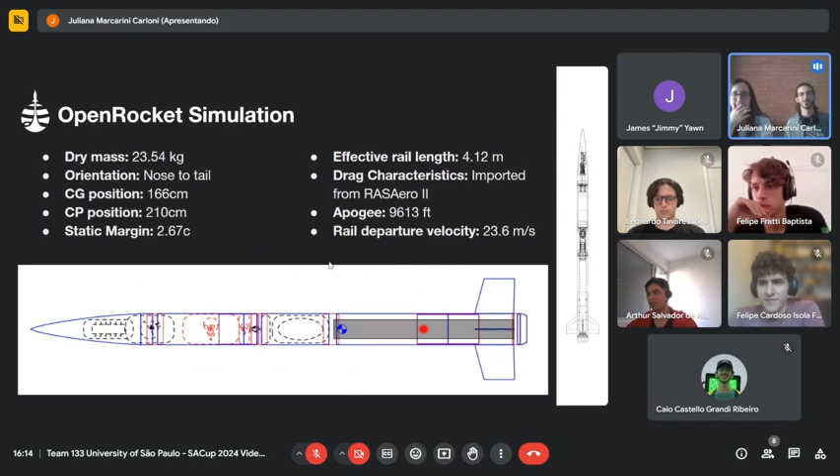So we're having a simulated apogee of 9,613 feet and a rail departure velocity of 23.6 meters per second. That's an upgrade for the departure velocity, which I'm really happy to see. Yes, it's a huge upgrade, and Leo will get into more detail on this later. It's a great relief for us too, because we don't like to work with really tight margins. So this is the complete flight simulation on OpenRocket.

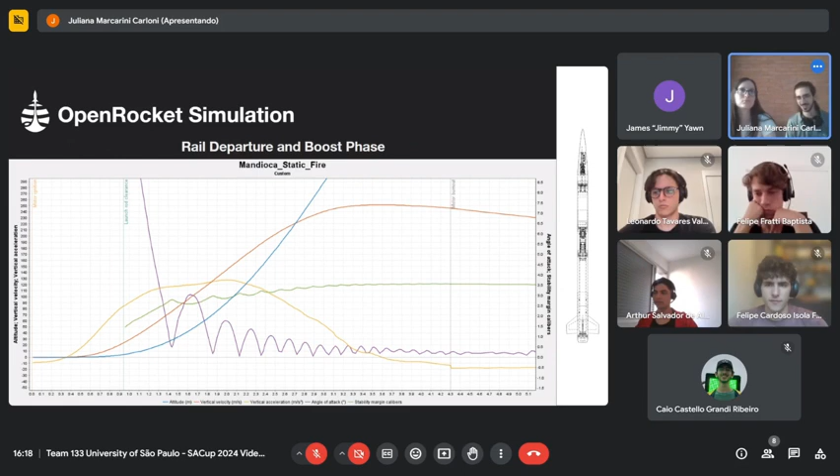So I'm going to go over to Arthur, who's going to explain the electronic systems in this rocket. Good afternoon, guys. I'm Arthur, the leader of the electronics team in Projeto Júpiter, and I'm going to give you an overview of our systems for this rocket.

In previous rockets, the electronics were very spread out throughout the rocket. We had the telemetry as part of the payload, and two identical modules to activate the ejection systems for recovery events. We had one set of altimeters for parachute ejection below the parachute, and another set in the nose cone for the disreefing event. I think Caio will go further into this in the recovery section.

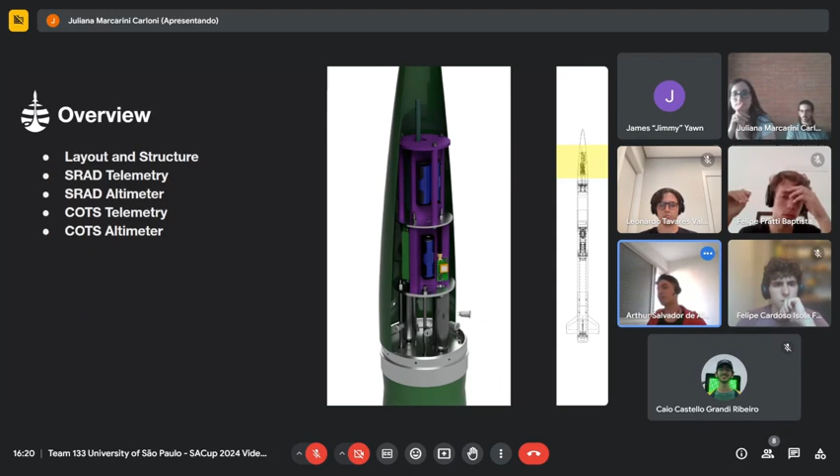For this rocket, we were able to invert the recovery. You can see in the images the cartridges are now in the nose cone pointed down. We were able to put both recovery events in the same module, so we only need two altimeters, the COTS and the SRAD. We also brought telemetry into the same module, which is better for us as a team since we don't have to integrate as much with other areas. Overall, it's a better design for us.

The module itself is mostly 3D printed, with some aluminum discs to support it. It's supported on top of the cartridges with threaded rods and nuts to lock everything together. It's very solid, and we also have key switches on the fuselage. We have four switches, each for a different system, to make things independent and redundant.

May I ask what material you're using for your 3D printed parts? It's PETG. Okay.

So it'll probably hold up in the heat. Yeah, and in our test flight we mentioned earlier, which was a ballistic flight, all the boards survived the ballistic flight. Oh really? Wow. Yeah, which was kind of surprising but great nonetheless. Well, very good.

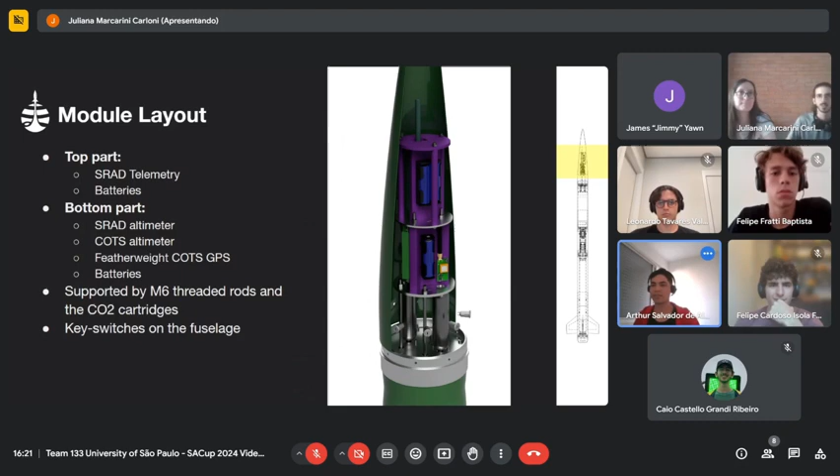The top structure is just like a vertical wall, and it holds the SRAD telemetry board. On one side it's screwed in with thermal inserts. Juliana is showing the module. On the back of the wall we put the batteries. We use two lithium-ion batteries to power the board in series, because transmitting requires a bit more power. We also have a top disk just for protection from debris or anything.

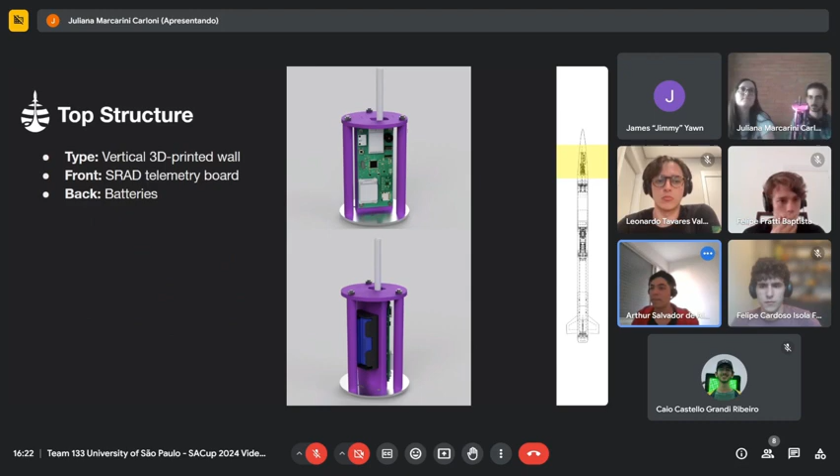The bottom structure is triangular. We have three 3D printed walls that fit together but are also independent, so we can take one out to work on the circuit, change batteries, or something, and put everything back together. The first wall has the COTS altimeter, the RRC3, which I'll talk about later. The other has the SRAD altimeter, and finally the featherweight GPS, which is the COTS GPS. They all have a lithium-ion battery to power them independently.

I have a question about the battery connectors, the battery bays. Yeah, sure.

Are they reasonably immune to inertial forces? Yeah, they are screwed in with thermal inserts behind the battery, and the walls have holes in which we fit zip ties. We put zip ties tightly to secure the battery so it doesn't fall out. Okay, and it can't move forward and backward and temporarily disconnect, right?

We had this problem once, but we solved it. Firstly, we put the spring of the battery housing down, so if we have a downforce, it works with the spring to not disconnect. And we really tighten the zip tie, really tight, so the battery really can't move.

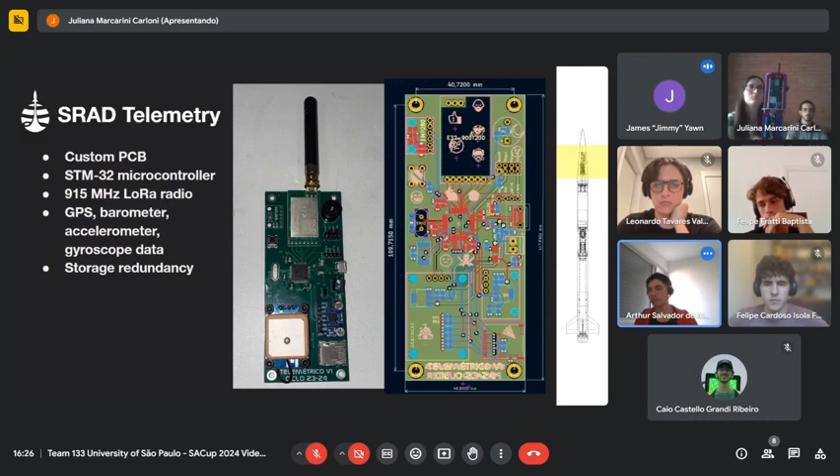We had GPS position, pressure, gyroscope, accelerometer, and it's based on the STM32 microcontroller and a bunch of sensors, plus the LoRa transmitter. I think that's it. Okay, it's pretty. You do good work. We're very proud of it.

And then we have the receiver board. This one we made ourselves in our lab. We're also very proud of it, it turned out really pretty. It's just a receiver, and it sends the data to the computer for the interface, which is the next slide.

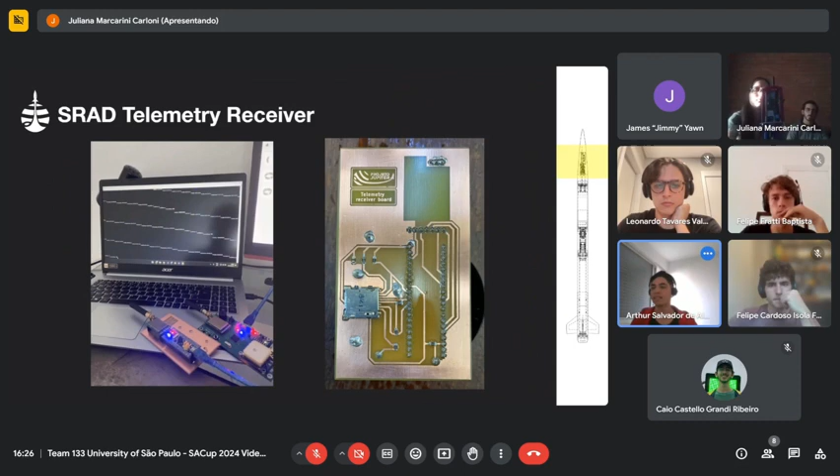Our interface, we're actually going to use this for the live video challenge. We're going to plug into the stream of the competition. It's an interface where we can see the data being transmitted from the rocket on the computer, for better visualization.

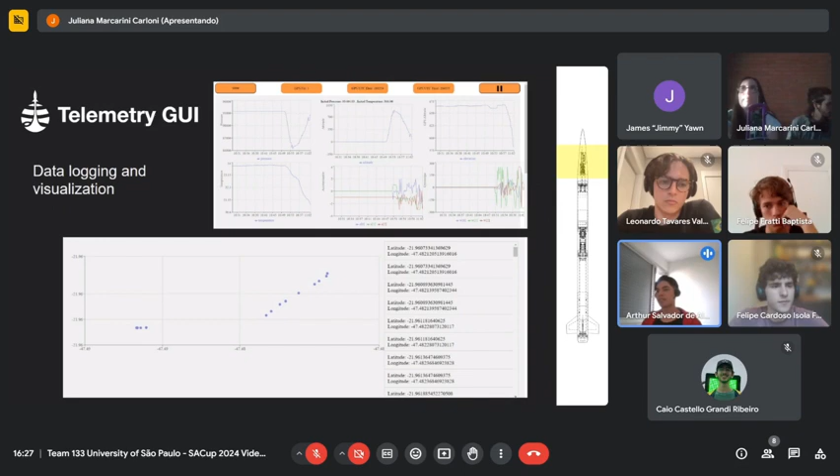Okay, so the COTS telemetry is the Featherweight. It has an independent battery, as you've seen, and an independent key switch, and it sends GPS data for the ground station. It's pretty simple. Good.

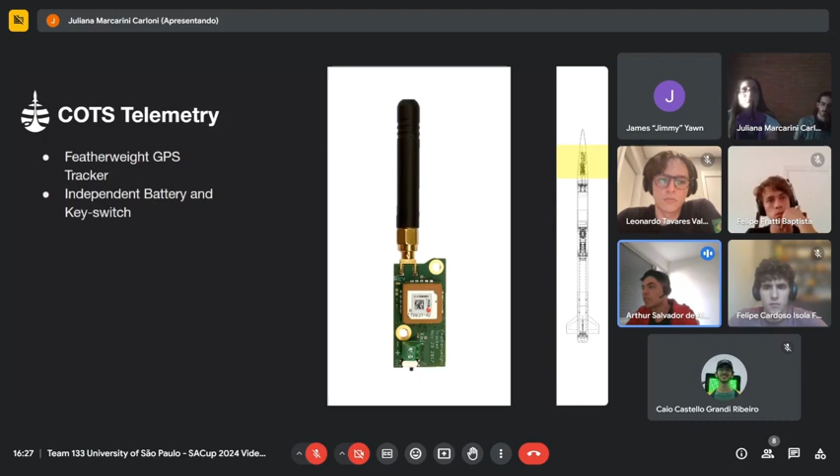And then we have the COTS altimeter, which is the official apogee logging system. We've worked with it, I think, ever since Jupiter existed, so we have loads of experience with it. It also has its own battery and key switch, independent.

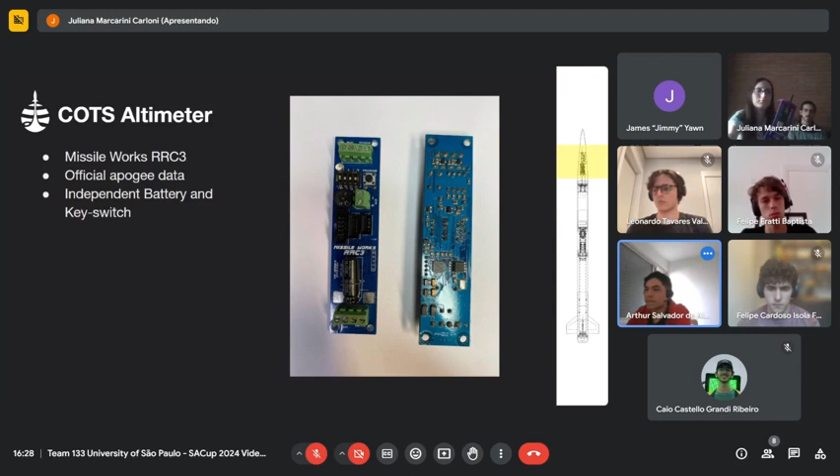And then this is our novel SRAD altimeter. It's actually the second version of it. We made it the same form factor as the RRC3, which is the COTS one, to make them interchangeable. If we have any problems, we can just put a COTS one there — like two COTS, not one SRAD and one COTS.

And it's kind of similar to the telemetry board. It's the same microcontroller, the same barometer, but then we have data redundancy — two different storage modules in the board — and we've designed some circuitry to make the board better than the first version. We have impact detection and reverse polarity circuitry.

Sorry, in case we connect the batteries with the positive and negative reversed, which has happened, and we fried one board. Yes, it can be done. Really sad.

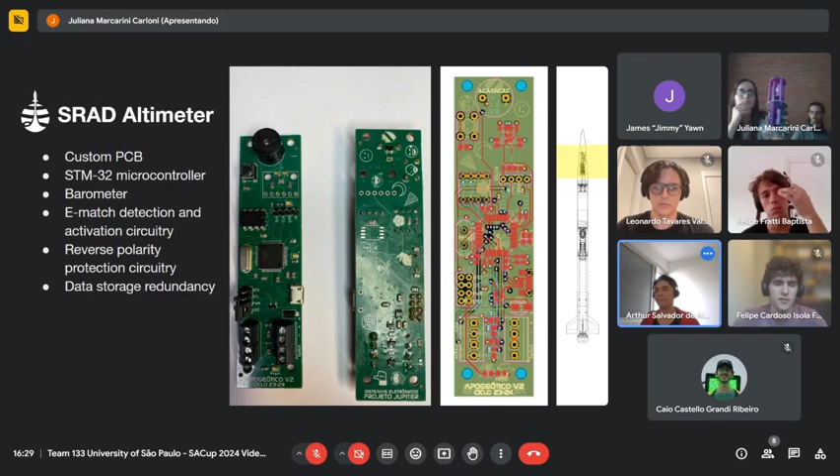And we now have a USB interface as well, to make it easier for us to acquire the data and to program it. And you can pass, I think. It's also pretty.

Quality in the making of PCBs.

So the software it runs, we have tested it many times. It's an adaptive filter, and it takes the discrete pressure data and turns it into a parabola, and we compare it to a reference parabola to find the vertex of the parabola, and then we can find the apogee. We have worked with it, we have launched it, and it works, and we are very confident.

And then in the graph you can see the filtering that it does, and it takes the noisy data and turns it into a smooth parabola as best as possible.

That's very interesting to me. Let me turn on my camera for a second. Where'd it go? Oh, there it is. Oh yeah, here we go.

Here's something I'm developing. It's an altimeter to fly on a model rocket with a C motor. It uses a Raspberry Pi Pico and a couple of chips on the other side, so it's like $10 worth of parts to put it together. The main deficiency is a very simple program I'm using to control it, doesn't have any kind of error correction, so it's not very accurate.

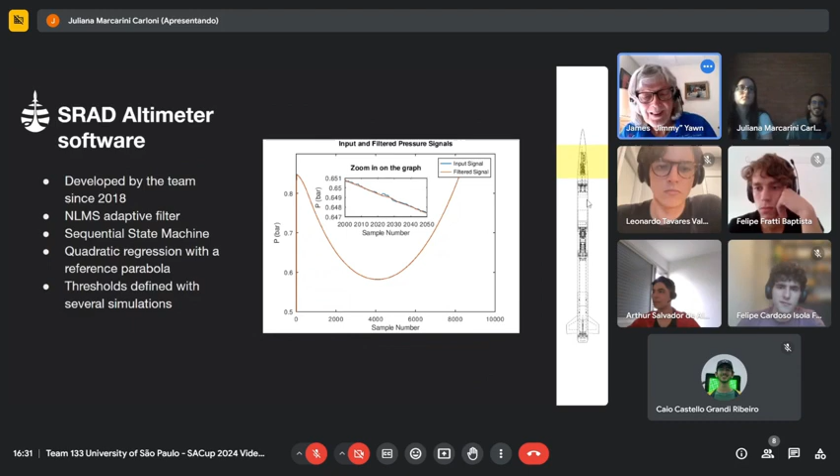Okay, so this is the testing we do of the altimeter, one of the tests, and it's the simulation, the ground flight simulation test. So we get the pressure curve, the simulated pressure curve with noise, and we feed it to the algorithm as if it was coming from the barometer, but it's not. It's pre-coded, it's hard-coded, but we treat it as if it was coming from the barometer, and then we just let the code run, and we see if the stages will be detected and activated, and we see if it will beep the apogee as it would in a flight condition.

And then I brought the video for you guys. I don't think... wait, is the sound coming through, Jimmy? I don't think so. Okay, I just hear some sound, hear a little beeping.

Oh, okay, I saw something. I'm sorry for the long video, but it's really the flight simulation. Oh, so this is the time that the full flight would have taken. Yeah, yeah, all the way to, the first one was the apogee, okay, and then the reefing is going to happen in a while. More fireworks, yay. So that's what we do to test if the algorithm works with the pressure data we are expected to have.

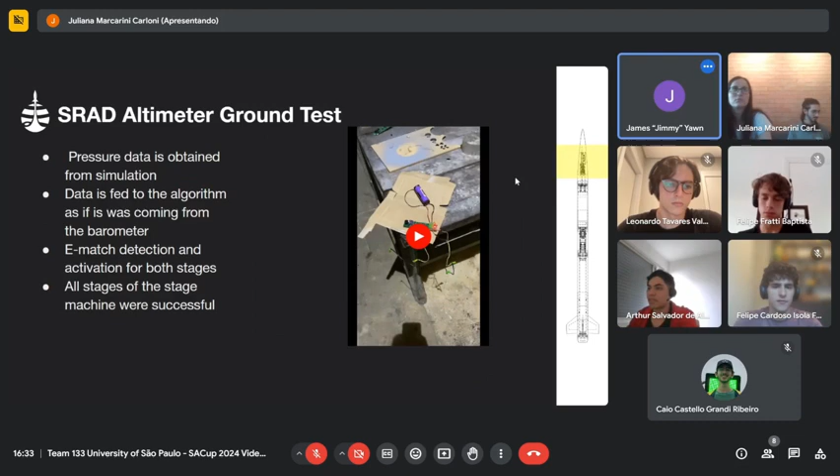And then we have the wiring and assembly of the module. This is the mini rocket that we launched in... I don't know, our flight, not a competition, sorry. And we always use a color code to wire the boards. The key switch for each board has a color. The connection to recovery has a color for each of the systems, SRAD and COTS, main and drogue, which is apogee and the reefing.

We use the screw terminals to connect the wires to the PCB boards. And then for crimping the wires, we always use just the metal tubes without plastic and the heat shrink transparent to make things visible and to see if the connection and the fixation was good. I think that's it, guys.

Okay, so I didn't present myself. I'm Kyle, I'm the recovery leader of the team, and I'm going to go over the recovery system that we're boarding on this rocket. So a quick overview.

It's going to be a reefed quarter-spherical parachute. Then I'm going to go through the linkages and shock cords, the CO2 ejection system, shear pin locking system, which is brand new, pyrotechnic disreefing system, and I'm going to go over the performance on past flights.

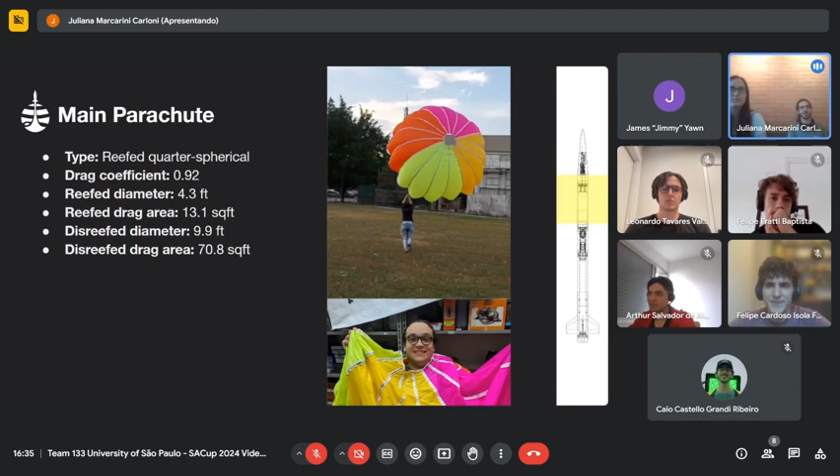Disreefed diameter of 10 feet, and disreefed drag area of 70.8 square feet. Okay, so this is it.

The first event will be trigger apogee, which will be the parachute ejection. It will be ejected out of the rocket in its reefed state, and it will cause an opening force on the fore section of the rocket, which is the nose cone and avionics bay, of 163 pounds force. On the aft section, which is the payload and rocket engine, it will be an opening force of 270 pounds force. The terminal velocity during the reef stage will be 72.2 feet per second.

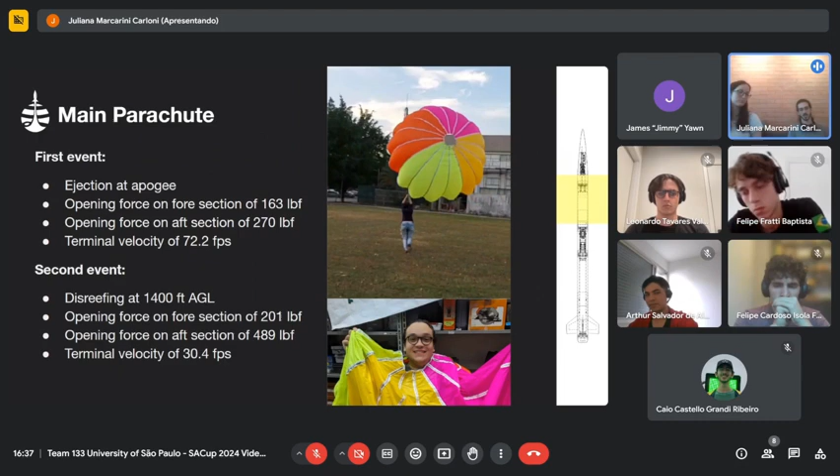So this is how the linkages are structured for this rocket. I can show some things because they're all laying around on the floor here. This is the riser, the part that will connect the parachute to the rest of the rocket. Here we have the carabiner that will attach to the parachute, the mounting structure for the line cutters, and the attachment points for the wiring harness for the disreefing, which are those little loops over here on the riser. Oh sorry, the shock cord.

All the connection points to the parachute and to the rocket are going to be done with quick links rated up to 1,350 pounds force, and we're going to use a swiveling link like this, I think you can see it, also rated to 1,350 pounds force.

The shock cords are made out of tubular polyester, rated to 3,600 pound force. We stretched them quite a bit from our first progress report, as you and Rick commented that it would help absorb some of the opening impact on the connection points. All the stitches on the connecting points are done with polyamide threads. This is an improved version of the same method we have been using since 2022, with some improvements here and there to make it stronger.

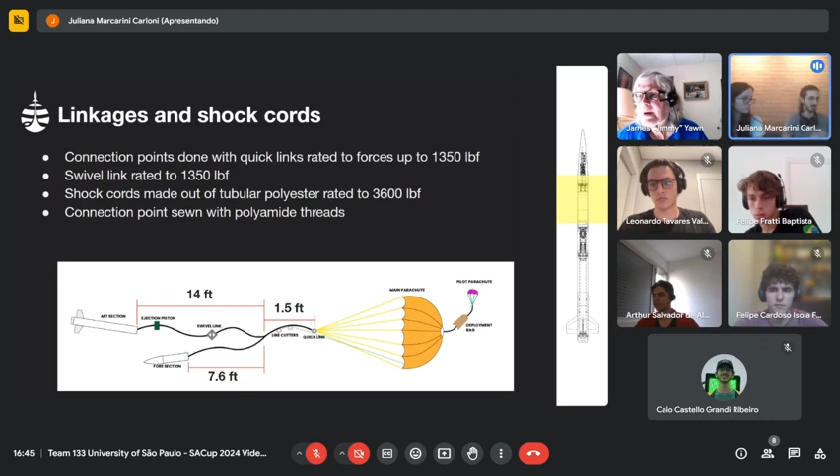All right, okay, so moving on to the ejection system. This is our good old trusty CO2 discharge ejection system.

We have a main charge of 45 grams and a backup charge of 45 grams, which we know is a lot compared to what other teams do, but it has worked for us. It has given us plenty of clearance at ejection. Since we're changing some things in the overall rocket layout, we're working with a larger diameter, so we'd rather have ejection that's more powerful than one that's not powerful enough.

Yes, I agree, especially since we're using shear pins, so we really want to make sure they'll break. It's a redundant activation by the COTS and SRAD altimeters. The ejectors are wired in parallel to each altimeter, so if one of the altimeters fails, both ejectors will still trigger, which is great. That means we can have one altimeter fail and one ejector fail, and still have a successful ejection.

And we have... where did I leave it? Oh, I messed up, okay.

Okay, we have a PETG piston that helps push everything out. It goes on top of everything here, touches the connection, and helps create a stronger pushing force that ejects everything successfully.

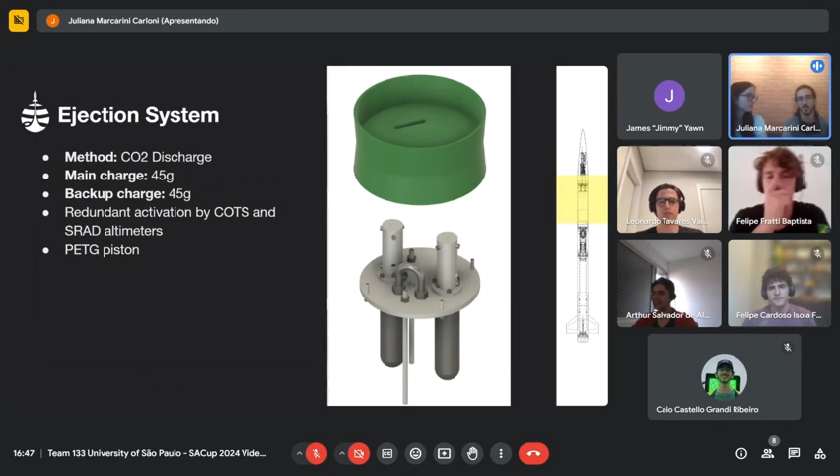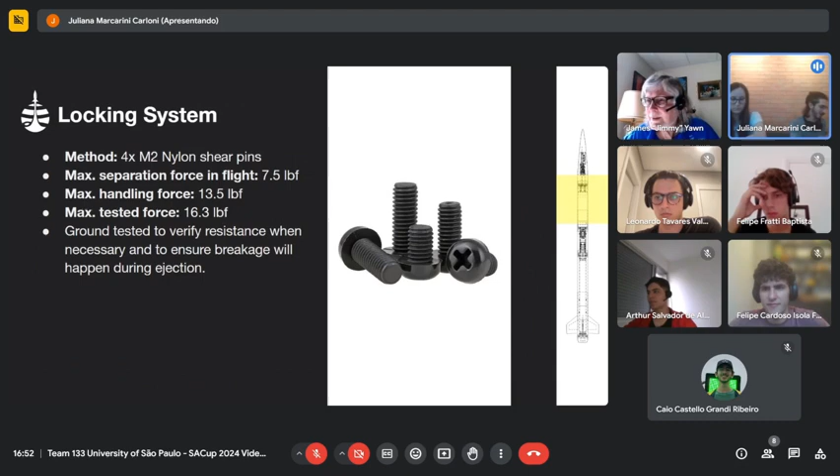Was that at a competition? I missed a little bit of that. No, this is our self-operated flights that we run only for testing subsystems.

This is the disreefing system, which is pyrotechnical with black powder. It's really simple, a sort of brute force approach. I have one assembled here. We use paracord core strands that run into this black powder chamber, and it fits on the harness, onto the shock cord. When it's triggered, it blows up the strands, and the paracord is free to run away, allowing the parachute to open fully.

We have one charge of 1 gram, and another one. They are in series, one on top of the other, so if one ruptures the cord can still run through, giving us redundancy. They are also wired in parallel with the COTS and SRAD altimeters. The wires are fed through loops on the shock cord, which I showed you, to avoid tangling and excessive tensioning so it doesn't rupture in flight.

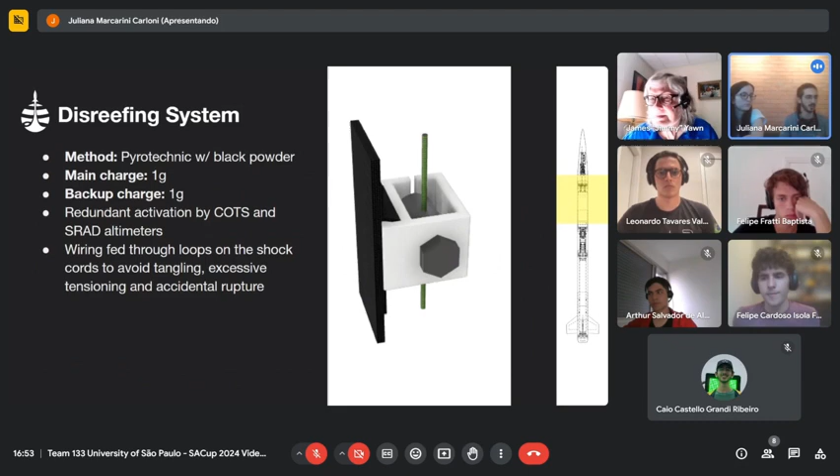In past flights with the system, we had a nominal recovery in 2022. In the test flight in 2023, we had ejection, and it was the first occasion where the wiring harness ruptured due to a miscalculation of wire length. What we added to the assembly routine was a stretch test, where we lay everything on the floor, pull the nose cone as far away from the rocket as possible until everything stretches, pulling from both ends to check if we have enough slack so it won't rupture on the opening force.

In 2023, as I mentioned, we had ejection. The disreefing was triggered, the control line was cut, but it didn't slide due to the twisting of the shroud lines of the parachute. We fixed that by changing the swiveling position. I don't know if you're aware, since I don't think you're judged in this category, but we took inspiration from Waterloo University and how they handle swiveling, so our system in theory is as effective as theirs in surviving twisting of the lines.

So I hope we have no problems. They didn't have a problem. Oh, and I hope we have no problems. We're testing this on and on. And I'm still passing the slides on the wrong computer. So that's it.

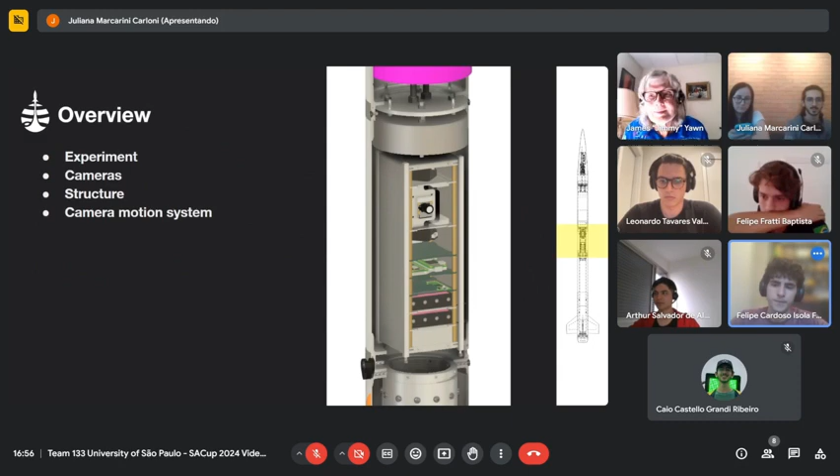Our experiment this year is called Tiltado, an acronym for the Image Leveling, Tracking, and Attitude Determination Operator. We thought about the letters for a long time so that it made sense. Sounds like it's tilting.

The main goal of the experiment is to develop video capturing systems on the rocket under high vibration and acceleration, so that in the future we can experiment with computer vision, and have better camera systems for marketing purposes to record the flight. That's something we weren't able to do yet, the in-flight video recording.

We're also going to work with attitude estimation of the rocket and control systems, by controlling the axis of the camera, which is attached to a motor that can rotate on its axis. The objective is that during the flight, we try to maintain the horizon line level with the camera in relation to its reference system.

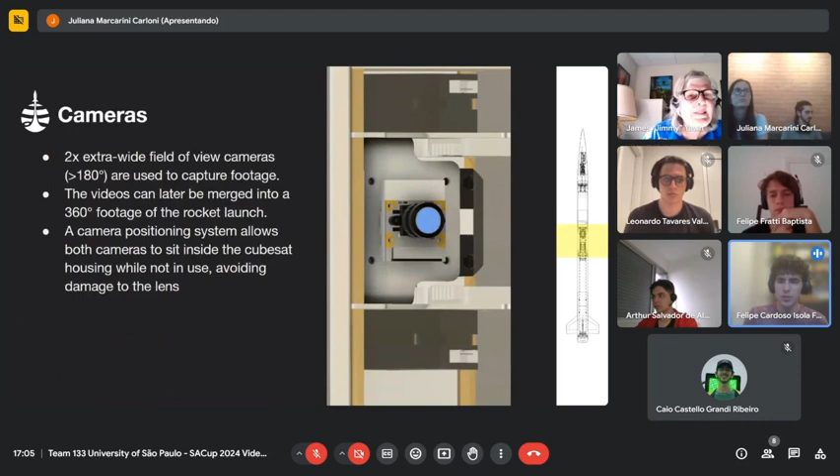And yeah, this is the whole experiment. And we can back up a little bit to slides. Pode ir para frente, one forward. I look forward to watching the movie.

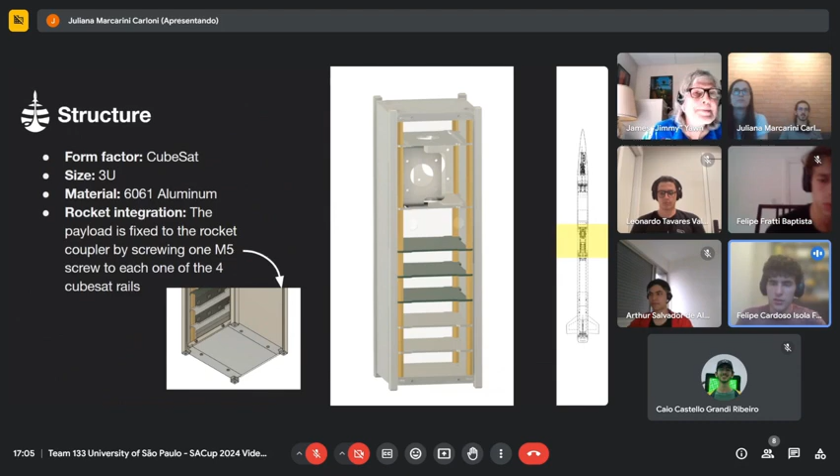I think we have the empty shelves in this photo, but now we have a newer photo with the components. And we have a structure of the payload inside the CubeSat form factor, organized in shelves.

That helps a lot while you're putting together the system. And the basic premise of the main parts of the system: we have the power supply.

Actually 8 lithium-ion batteries, split into different power supply sources. We have 4 of them that are going to be used for an independent power supply for the motors, 12 volts. And we have 3 of them for the main electronic components of the system, and 1 of them that is going to be for the third PCB board that isn't directly related to the payload itself, but is an experiment we're doing for our group.

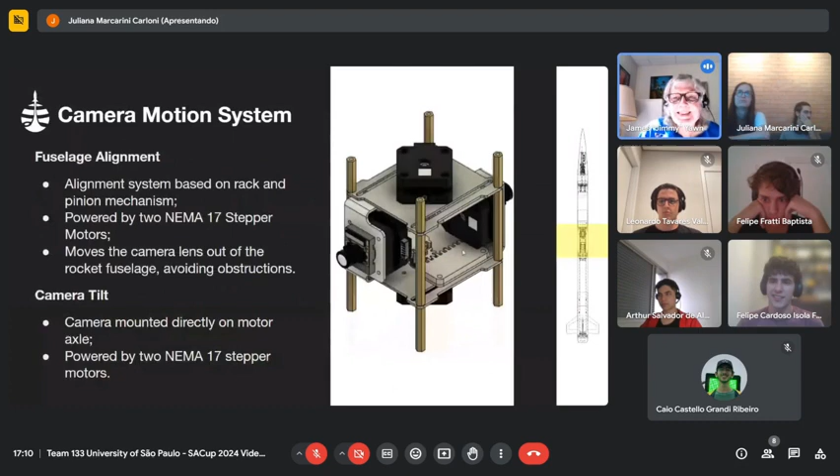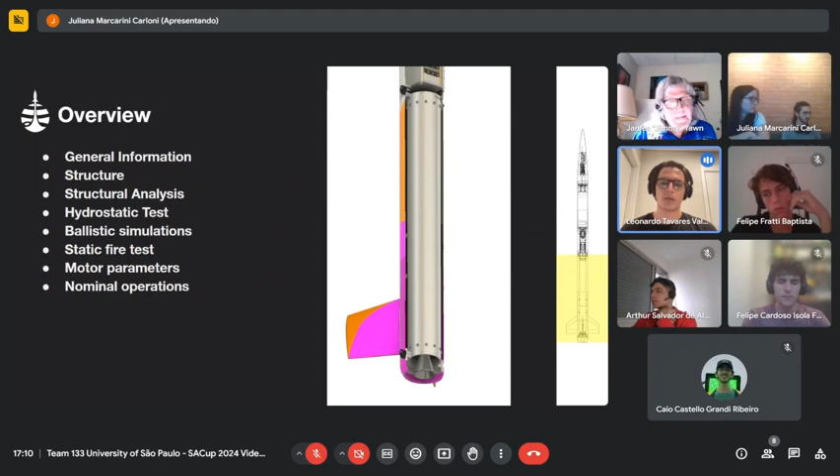So I'll be passing an overview through the propulsion systems. You get general information about the motor, the structure and its analysis, the tests we made, the simulations for the design of the motor, then the motor parameters, and another flights that we used that motor. Actually, it's the same motor that we used last year in June 3. So we can pass on.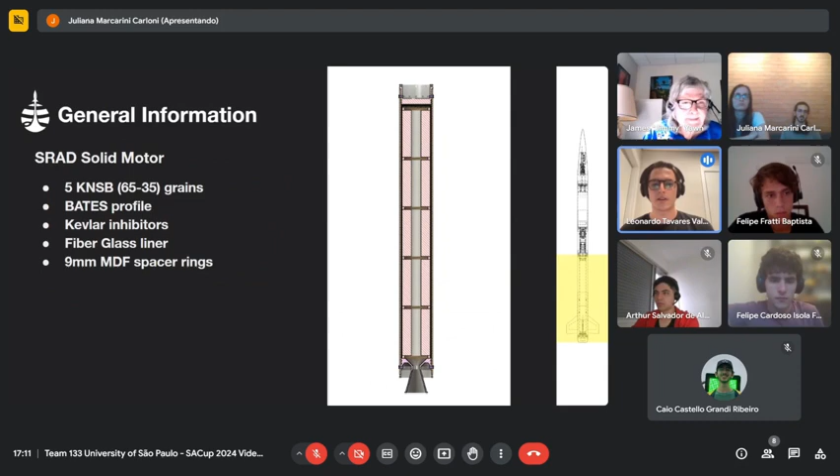For the structure, we use 6101 aluminum casing with 2 lines of 12 M6 steel bolts for the nozzle and the bulkhead, 2 O-rings on each closure for sealing, and the bulkhead is made of aluminum 6351, while the nozzle is 1020 steel.

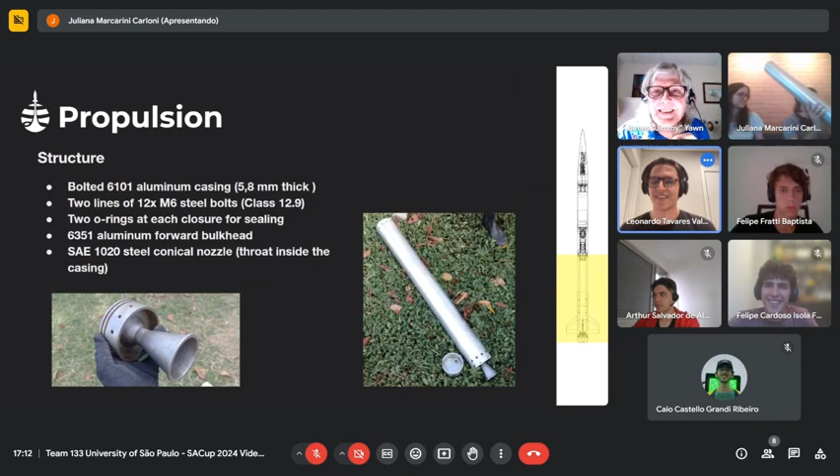We also have the chamber. It's a big one. I like big ones, it's a bigger rocket.

So for the structural analysis, we analyze bolt shear, tear-out, bearing failure, case tensile, and von Mises yield failures. For the analytical analysis, we got the lowest safety factor of 2.2 for the bearing, and in the finite elements analysis, 2.48.

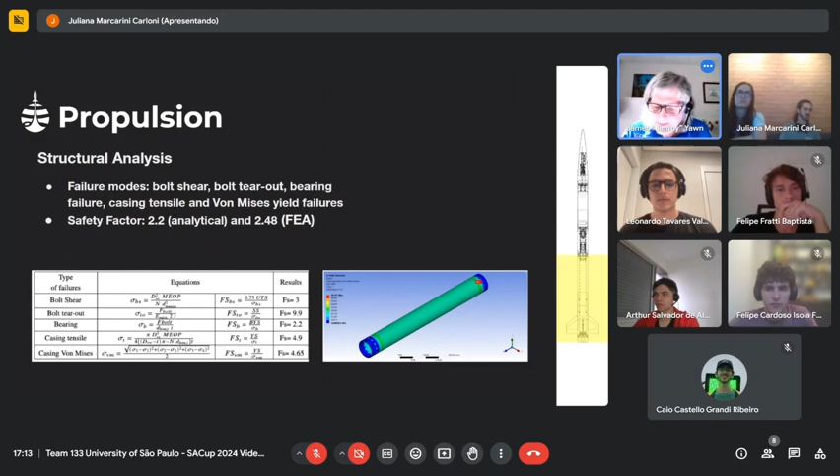Passing to the hydrostatic pressure testing: with a hydraulic pump, we hold a pressure of 90 bar inside the chamber for 100 seconds to verify if there was any leaking or damage to the structure.

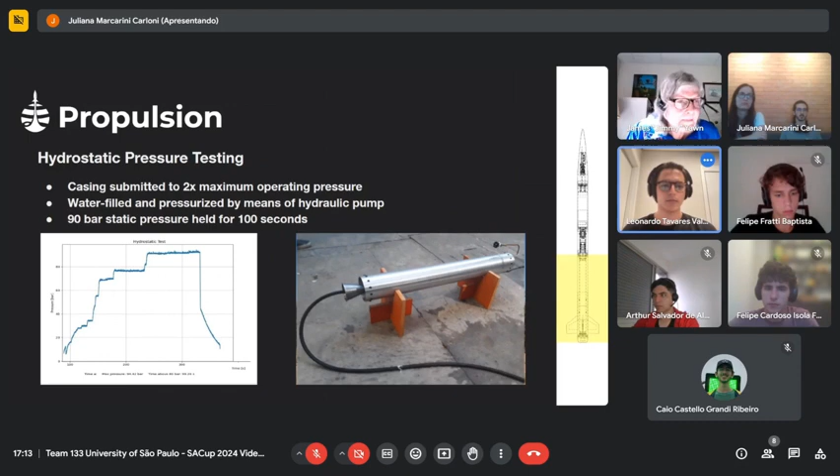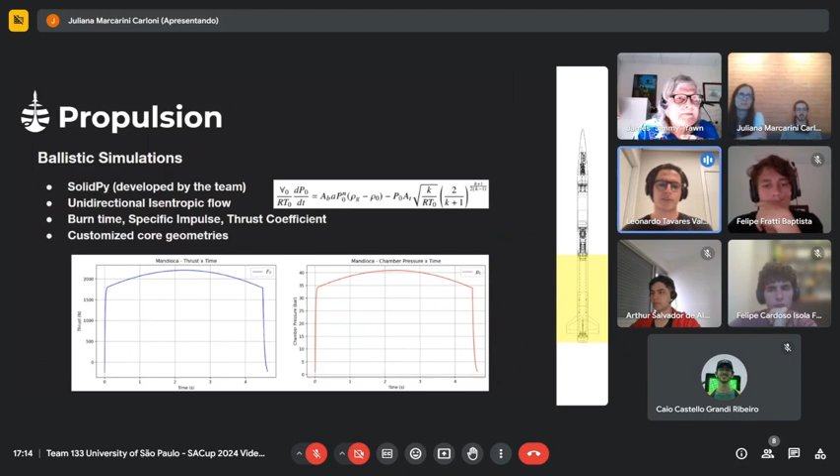For the ballistic simulations, we use our own open source software, SolidPy, developed by the team, using unidirectional isentropic flow for the ballistic calculations, in which we get the burn time, specific impulse, and thrust coefficient. In the software we can use customized core geometries. The results for this motor were cross-checked with OpenMotor.

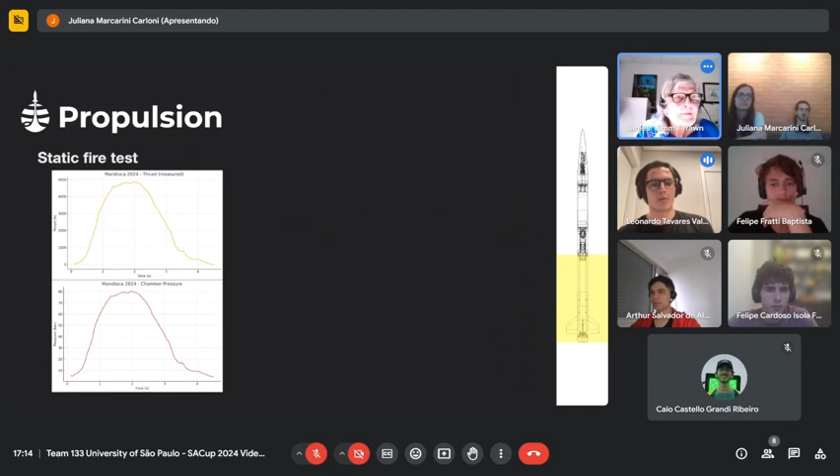So this year we managed to make another static fire test, shown in the following video.

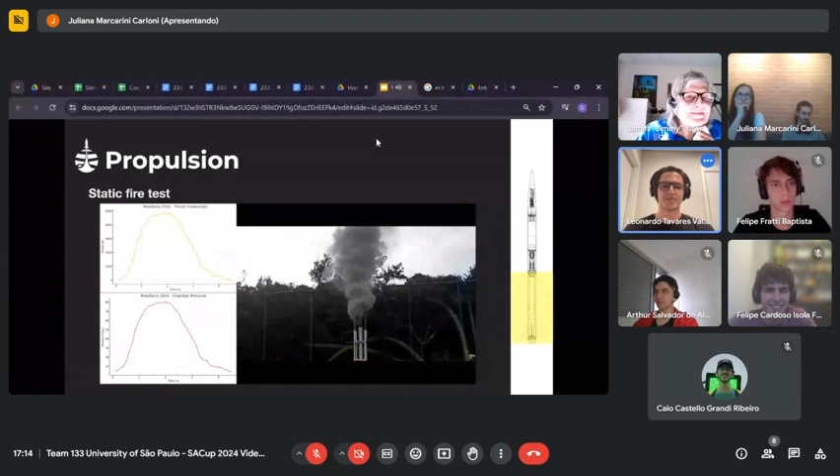In which we were able to measure the thrust and the chamber pressure curve.

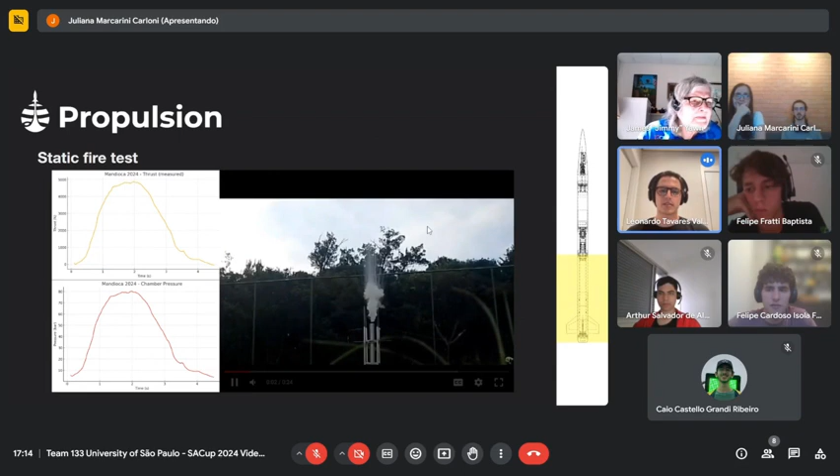Passing on, here are the general parameters for the motor: 17.9 pounds of propellant with a load mass of 34.4 and a burn time of 4.3. That was a little improvement from last year in burn time. So we got a lower burn time and a higher max thrust this year in this year's test.

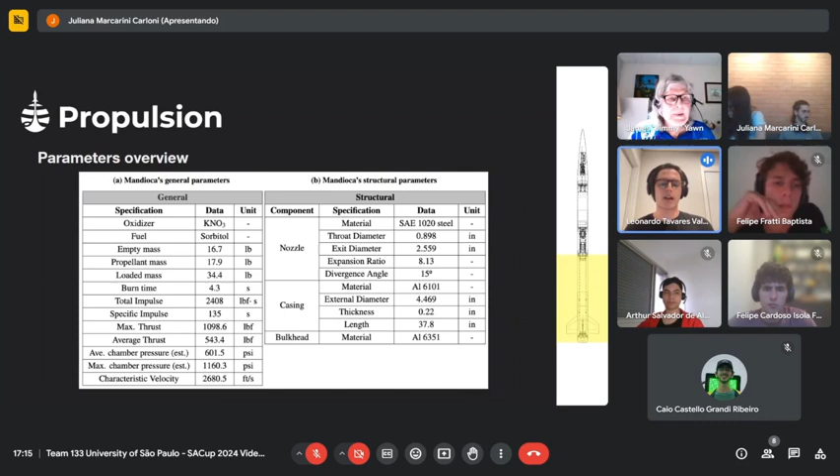As I said, this motor was used on previous rockets, so it will have nominal operations. These both competitions happened in Brazil, COBRUF and LASC. This motor was actually born in 2017, so it's a little old motor. The motor was used in Imperius at COBRUF and in Juno 2 at LASC.

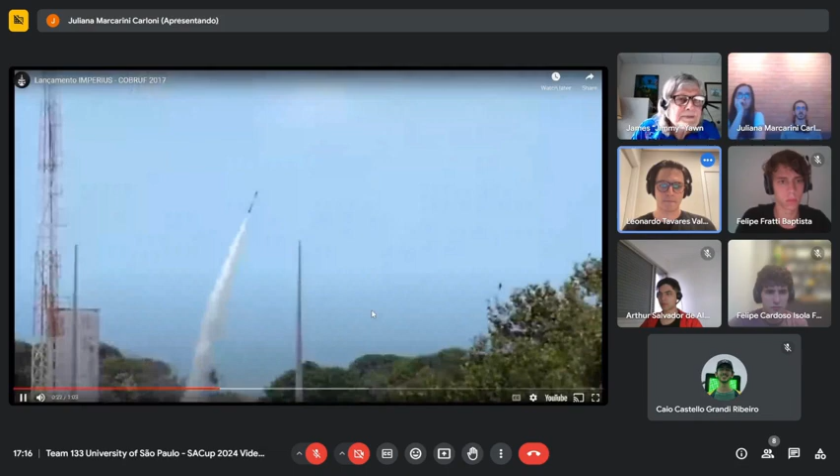Below we have the following videos of the launches.

And for the LASC launch.

And last but not least, last year we actually used this motor at Spaceport America Cup. Here are the videos for the launch.

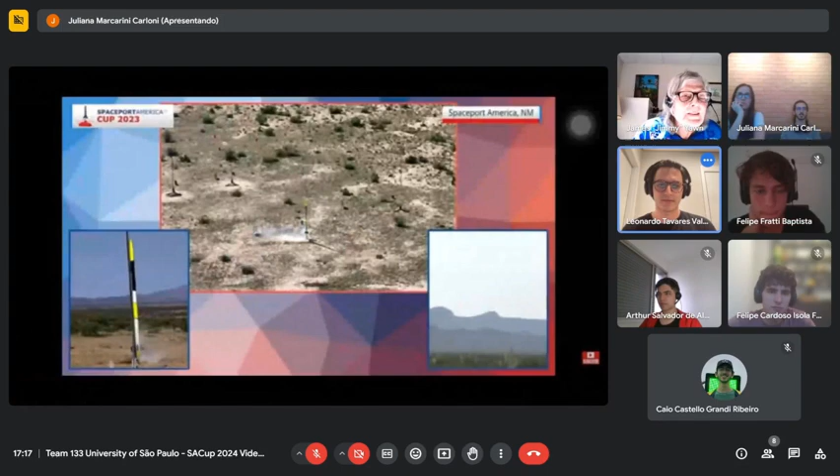Very nice, I love your movies. You never get used to it, right?

Yeah, so that's the propulsion section. We used the same motor as last year. We passed this year since last Spaceport improving our propellant manufacturing. In that matter, we were able to achieve some improvement in thrust that resulted in a better rail velocity.

It looks like you have a very well developed motor, and apparently you've mastered the making of propellant. I'm proud of you for doing that. Thank you.

Hi Jimmy, hi everyone. I'm Felipe, another Felipe. And I'm gonna talk about the aerodynamic surface and some structural bodies of the rocket. There is an overview.

I will talk about nose cone, fins, boat tail, fuselage, couplers, rail attachment, and structural analysis. I'll begin with the nose cone. The shape of it is von Karman, from the Haack series. Kyle will show it to you now. The total length, the curve section is almost the total length.

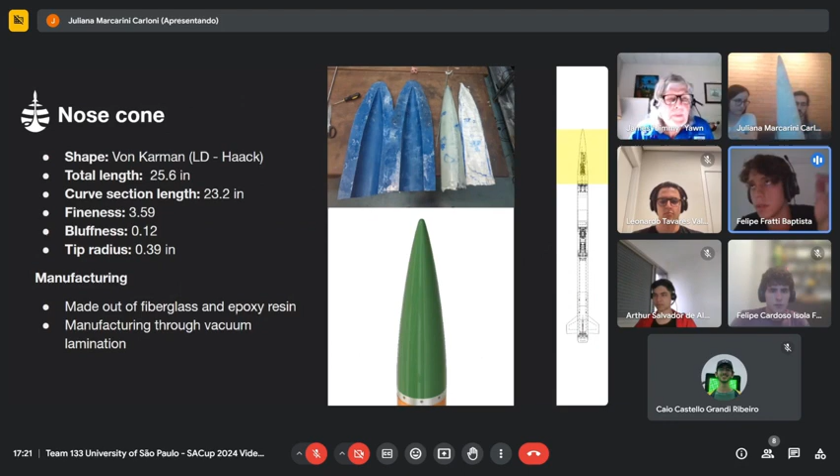It's made of fiberglass and epoxy resin. Last year we used 3D printing because of the shape of the nose cone, but it had some problems. It's heavier than this one, and another issue was that the last nose cone was made of PETG reinforced with fiberglass, but the part attached to the couplers was not reinforced because we needed to use adhesive there. So this year we changed it, and it became lighter and better in its structural function.

Now I will talk about the fins. We use an airfoil in our fins. The shape of the airfoil is not the standard NACA 0012, I don't know how to say this in English.

Sorry, but we do something new in this, just something we used in the last project of SACUP. We call it truncated - it's like a cut in the final section of the airfoil.

The main result of it is that it becomes stronger, because when we need to recover the rocket, it needs to... how can I say, it needs to become, sorry I forgot the word. The purpose is structural, and it needs the tip of the airfoil to be hard to not break.

We had some other cases where the tip would break, so we reduced a section of the airfoil. That could be better to avoid unpredictability in flight or at separation and recovery points. We did some CFD tests to see the difference, and the drag difference was minimal, so it's not significant.

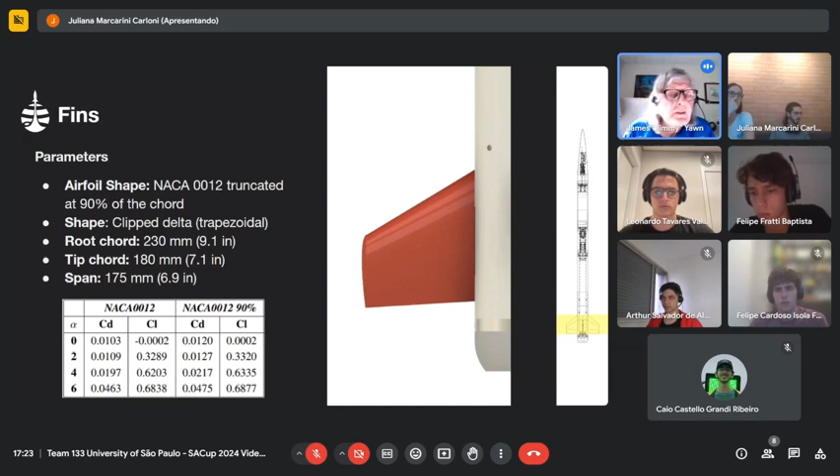I have a question about how the fins are mounted. I will show it in the next slide. Oh, you're getting there. No, it's okay, perfect, good timing.

About the manufacturing of the fins, the airfoils are 3D printed, and the fin cores are made of carbon fiber. The reason is it's hard to manufacture the airfoil, so we need to 3D print it, but for better resistance we use a carbon fiber core in the middle of the fin for more strength.

We attached the core and the airfoil with the same adhesive that we use in the couplers and tubes. Another thing we use in attaching the fins to the rocket is a tip-to-tip method to reinforce the section, since we know this attachment area is very fragile.

So we reinforced it with fiberglass, and some holes we fill with flux, the cotton fiber, so we don't have problems with it. As shown in the image.

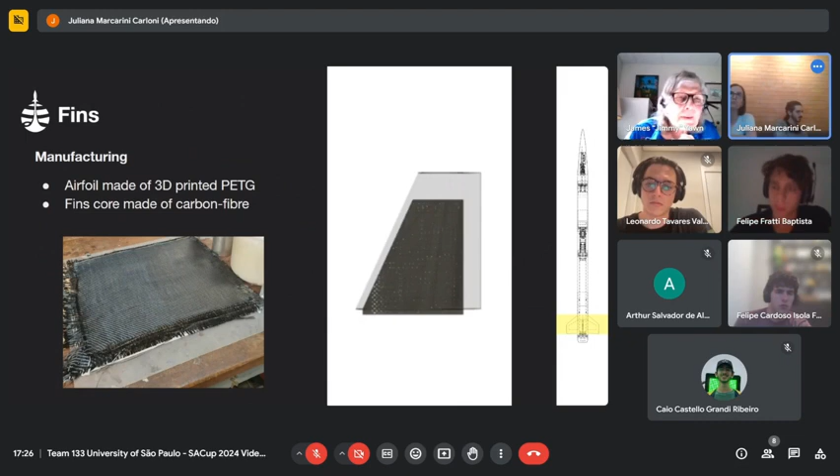Now, this picture, I have a question about it too.

It looks like you're just getting started with the tip to tip. I assume the fiberglass will go all the way over the fins and down the other side. No, we just do it in the intersection sections, not all over the fin. It goes from the tip of one fin, over the fuselage, to the tip of the other fin with a single fiberglass strip. This is to even out the filleting part so that it doesn't kink over there.

Now I will talk about the boat tail. The shape was a circular arc. For the boat tail, we used a NACA memorandum to design it, for 0.6 Mach, which we thought was the proper velocity to design it. The manufacturing of the boat tail was the same as the nose cone, but it's a little bit easier because both sides of the boat tail are open, so it's easier to manufacture. We use the same vacuum lamination so it becomes lighter.

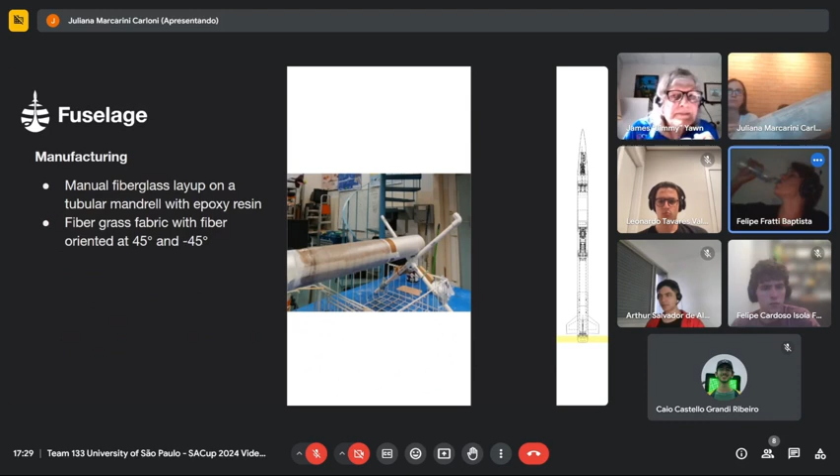Now we'll talk about the couplers that we use in the tubes. Juliana and Caio are showing it to you. They are machined out of aluminum 6351-T6. They form a male and female system, a pair, which as the name says is standard, so we can change tubes if needed. It's like a male and female to make it modular and easier to attach the modules of the rocket. The bulkheads are bolted to an internal flange. You can see the bolts inside it. This works very well.

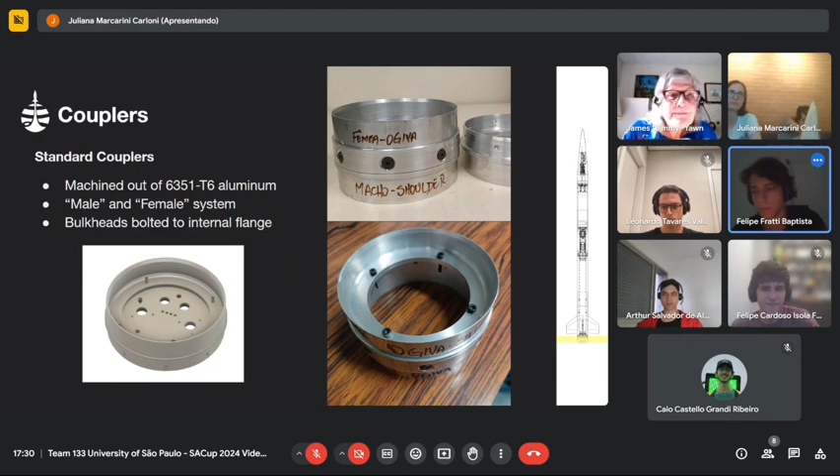About the recovery, we have a coupler in the recovery system, so it can slide in the tube and we can do the recovery. The coupler is made out of fiberglass and epoxy resin, same as the boat tail, same as the nose cone and the fuselage tube. We attached it to the fuselage with Araldite adhesive, the same one we use in the couplers in the fuselage too.

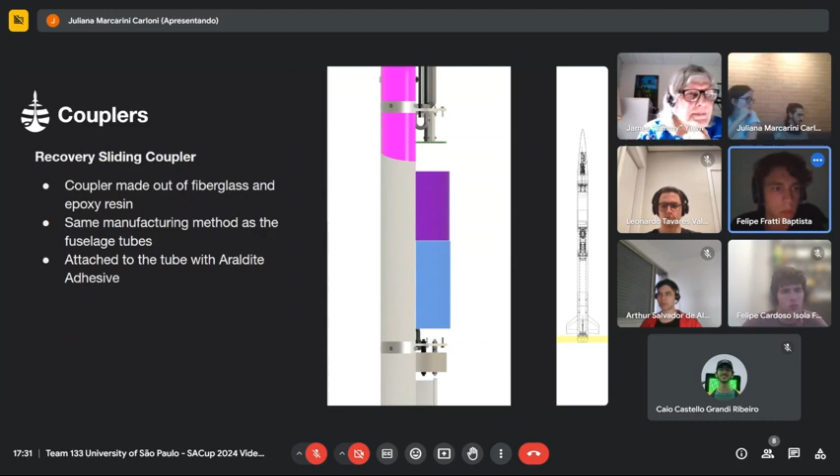We have the motor tube coupler. The motor tube is separated into two parts to facilitate packing the fuselage in the bags, since with the fins it's a little bit hard to transport. The coupler is made out of fiberglass and epoxy resin, and it has one diameter of interface in each tube, as recommended in the manual, to give enough length to this coupler. In this tube we don't have a structural purpose, because the motor chamber and other parts of the motor have the structural function in this case.

The last part is the rail attachment. It's made in an airfoil-shaped rail button and attached with the couplers using bolts, so we screw it in. Nowadays we manufacture our own rail buttons, but I think for the competition we bought some for their properties.

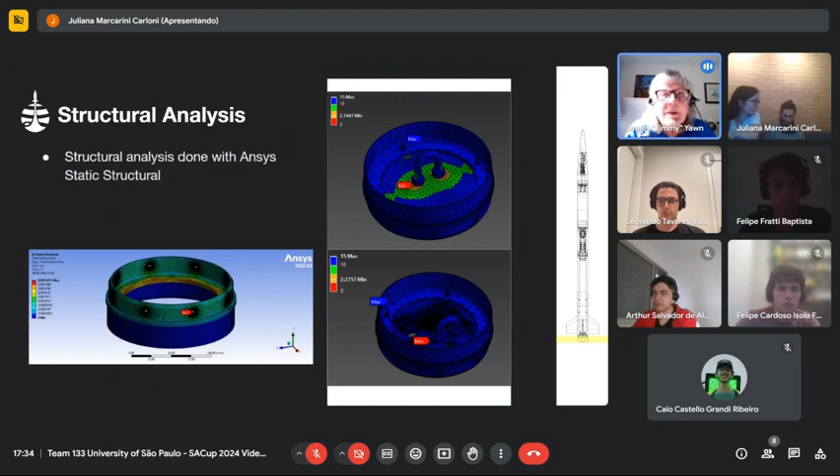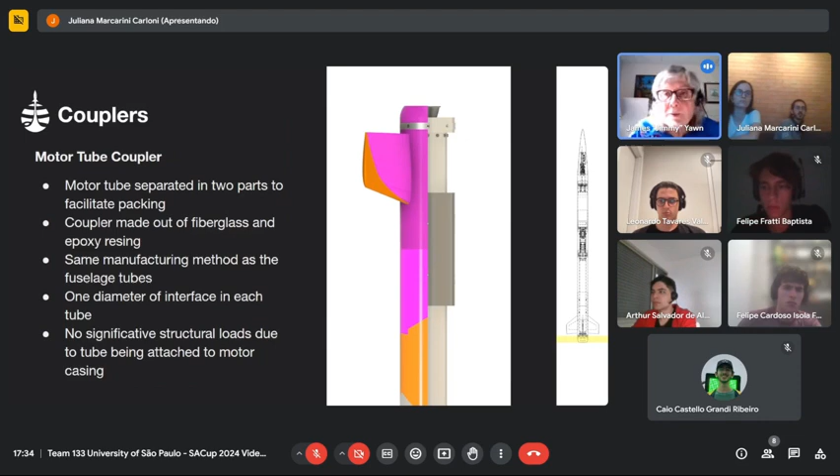I'd like to go back to the aft end of the rocket with a boat tail. My question is, what is your motor retainer? What holds the motor in the rocket? Oops, sorry, I forgot to put in that image, but we have a special coupler.

Okay, I'm really sorry. Oh, that's okay. This is it. Let me just turn on the cut here so you can see it better. Where is the cut? Okay, here.

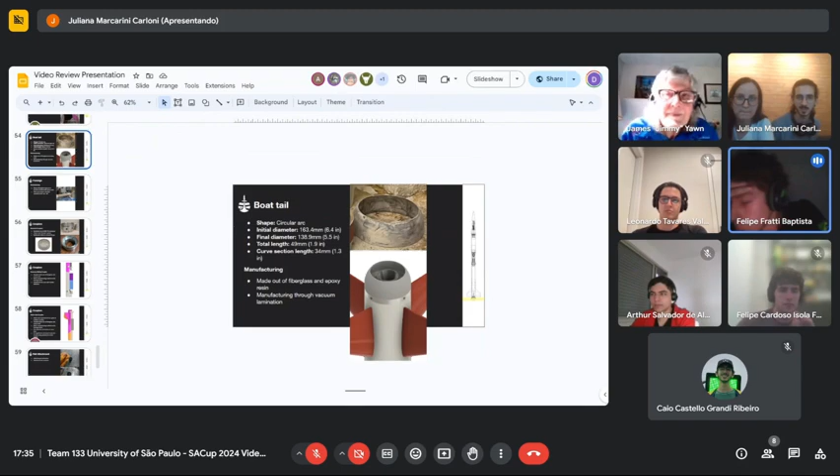But they will show to you. It's a coupler that stays at the end of the rocket. It's attached to the motor body and the boat tail, and it has the same diameter as the motor. So with the friction, it can align the motor, and the motor is screwed.

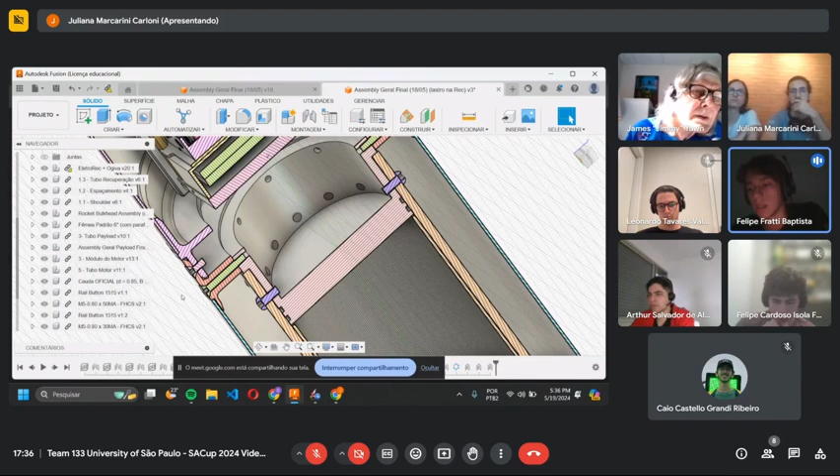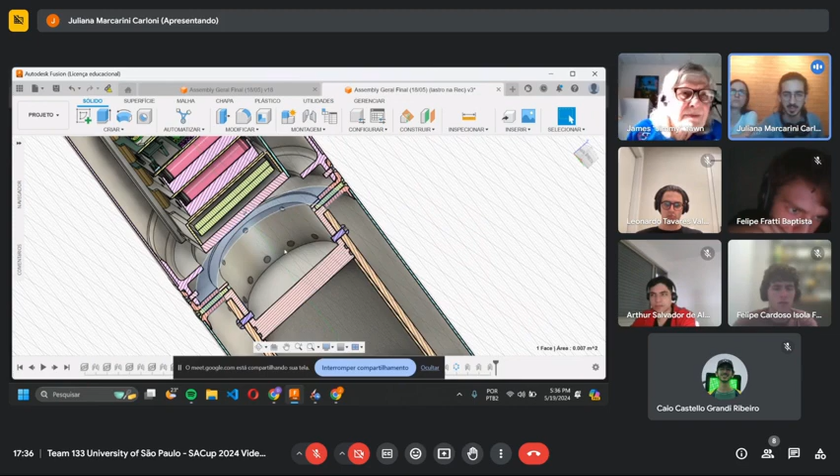The upper part of the motor is screwed into the coupler. Here you can see in pink or salmon, whichever color it is, this is the forward closure of the motor, and it is directly attached to this coupler, which is sort of a double coupler. It works as a female coupler on the top side, and it has a centering ring here.

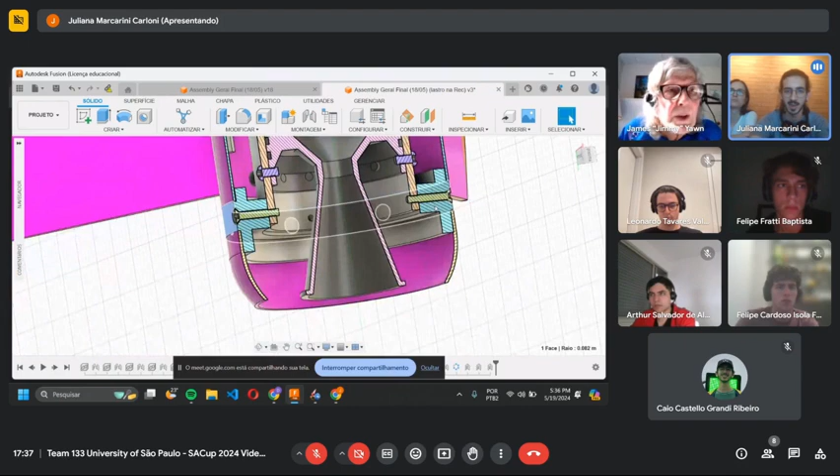So it holds the motor by the forward closure and the motor tube. This tube actually suffers no load, or little load, because it shares the load with the rocket structure itself. And on the bottom we have another centering ring here in cyan that holds the motor and the fuselage together.

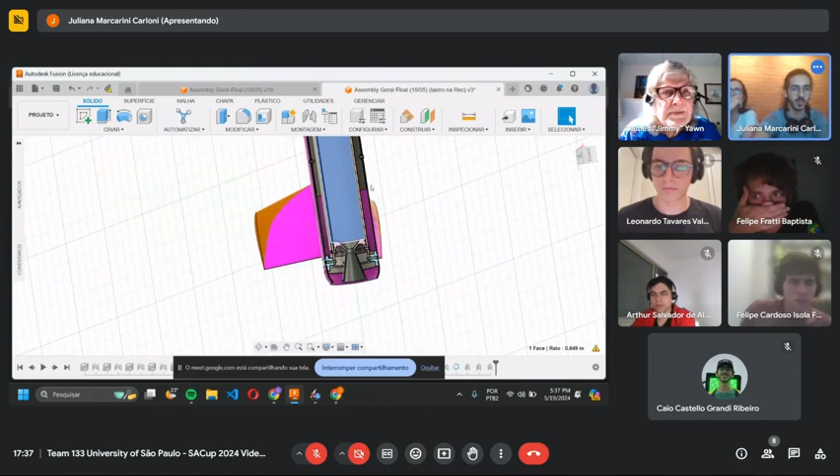So that bottom ring is also holding the motor in, right? It's more of a centering ring than a retaining ring. Because here the casing is holding most of the load rather than the fuselage, since you have almost no weight here behind the motor, because the motor is pushing the upper frame with the bulkhead.

So the casing is supporting the motor here, and this just attaches the motor to the fuselage to keep it appropriately centered.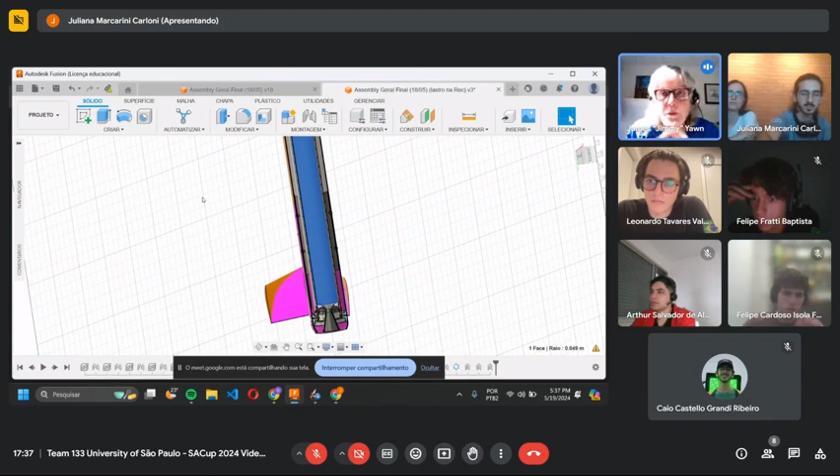Well, the two concerns are: first off, that the motor can't fall out, which is pretty obvious it won't - you've got a lot of screws holding it in from both ends, right? The other concern is how the thrust of the motor is transmitted to the rocket. If you go back to that head end, can you zoom on that again for just a moment, where they couple together?

I haven't examined this closely, but it looks like your major thrust is going to come through that coupler. Is it just the screws that are keeping the motor from going forward, or does it impinge upon a flange or something within that coupler?

It's just the screws, but it's 12 M5 screws, and also the friction between them. We can also talk about friction, but just getting to a worst case scenario, it's a bunch of M5 screws, and that's the strategy we've used to hold the motor in previous launches as well. It has held up with no problems.

Okay, so you've done this before and it's worked okay with the same size motor. Okay, then I'll go with it. It's this line of screws here, and it works just fine.

What I would suggest, if you want a little exercise and you haven't done this yet, is to do a stress analysis on that junction. I think we have done that, but there's a chance we might have done it before the new thrust curve.

No, but the safety factor is way up, so it's updated. What I talk about is the safety factor - it was 3 in this case, for the female coupler that has the 12 M5 bolts. In this case, the safety factor is okay, so we simulated it.

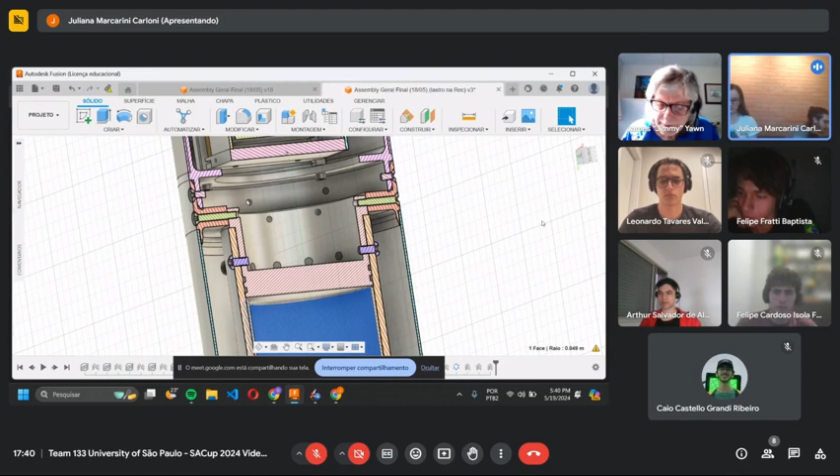Okay, I will share my screen because I have the pictures that I told you about from the tangled shock cords from last year's launch. Let's see, window here.

Okay, yeah, I'll work on the method you said of zigzagging and tying up with something that can release in case of excessive tension, and just to add another layer of safety to that, because it's a really hard moment of flight to simulate, since it only happens up there.